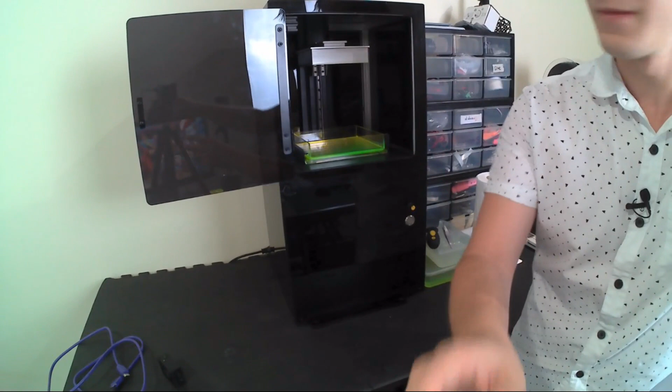So what you've got is you have the resin bath, which is filled with UV curable resin. I may need to top that up. And you have the print surface that drops into the resin bath, and then the laser's in here, and that will cure the bottom layer and it builds up.

So I'm just going to put on some of these bad boys just in case. It's not that dangerous, but just to be better safe than sorry. Let me just pop out chat so I can see it properly. There we go, so I'm just going to power it on.

So the SLA printers, there you go. It tilts the bath. SLA printers home like any other 3D printer, but you've got just a Z-axis though, in this case. The thing about the Moai, which is cool, is it has an actual galvo spinning mirror system. The laser is down the bottom, and it hits two mirrors, which make the X and Y axes on the plate.

So Ben, the printer's currently on Kickstarter at the moment, and he's already passed his goal. So this is a pre-production unit. There's a few things I've been in touch with Mark about to change, but yeah, it's already reached its goal, which is pretty cool.

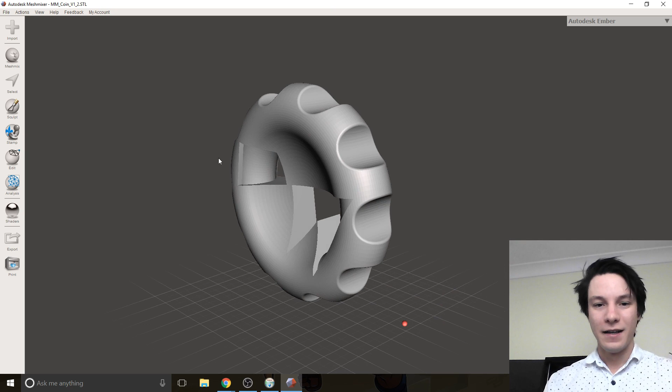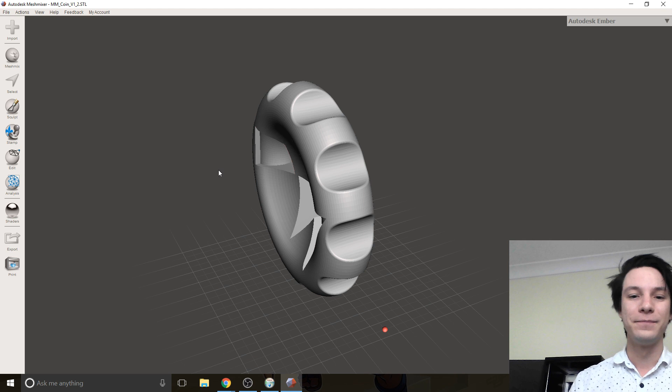Okay, so when you're setting up an SLA, you need to take into account the fact that you can't have a hollow object that is completely sealed. What that means is FDM prints in air, and you can have air inside the part. SLA prints in liquid, therefore there would be liquid inside the part, and SLA resins are pretty expensive. So I'm not going to do it on this model here, but I've got some examples I'll show you in a minute where you might want to hollow them out, for example.

Alex is asking have I run the Form 2. Not yet, though I do have one on the way, so I will compare it between the two. Although, to be fair, the Form 2 is a lot more expensive, so keep that in mind. It's going to be a better experience, but it's going to be a more expensive experience.

No, no, the Kickstarter's just started. It's already reached its goal, though, which is cool.

Okay, so the thing I learned when I visited Shining 3D in China, Hangzhou, China, is to get the best finish out of SLA, you don't want to print the parts flat on the build plate. You kind of want to print them at a 45-degree angle or so. That hides the layers better.

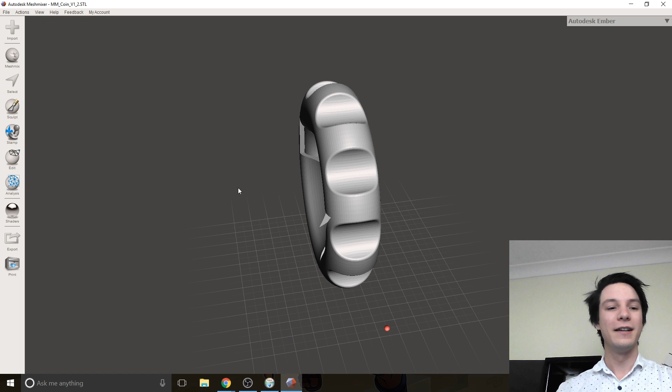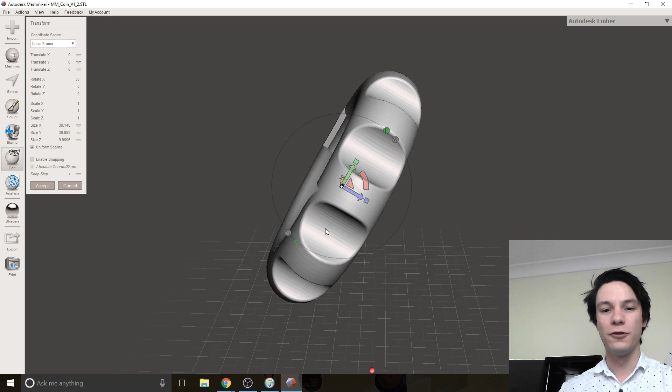So what I'm going to do first with this coin is orient it to be slightly angled. I'm going to go to Edit, Transform, and just rotate it maybe 30 degrees - not fully, but that will do. Also, I've got it upside down at the moment, and I'm pretty happy with that because this sharp edge would normally be difficult to support if it was facing the other way. So I'll accept that. Also, this is fairly computer intensive, so hopefully it won't stuff the stream up.

I'll keep looking at the chat if I can. It's 3 a.m. in Germany. Welcome, Tyson Power, thanks for joining me.

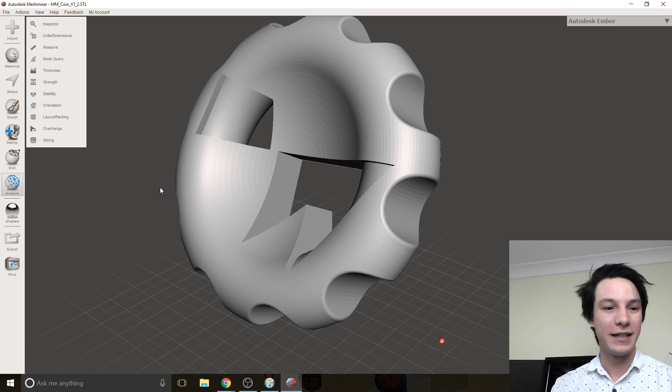Okay, so what we're going to do now is apply our supports. We're going to go to overhangs, and MeshMixer will automatically detect where it might need support material. It has various presets, and I'm going to choose SLA or DLP printer. This is where the stream might stutter, but I'm going to then generate support. I have an angle threshold - I'll leave that at 45. Let's just see how that goes.

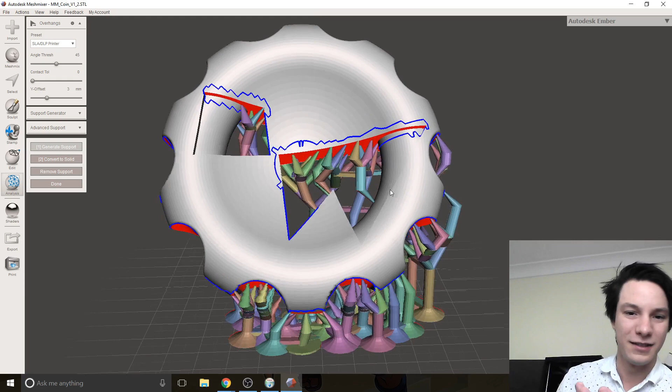Cool, okay, so this is a pin or tree-like support structure generated automatically from MeshMixer. Straight away, I can see it's done stuff that might not be needed, like here. But just in case, I'll print it anyway. Oh, actually, no, I won't - I'll just remove those supports and change the angle threshold slightly, because that's too much support. Let's change the threshold. Come on. Let's go to 60.

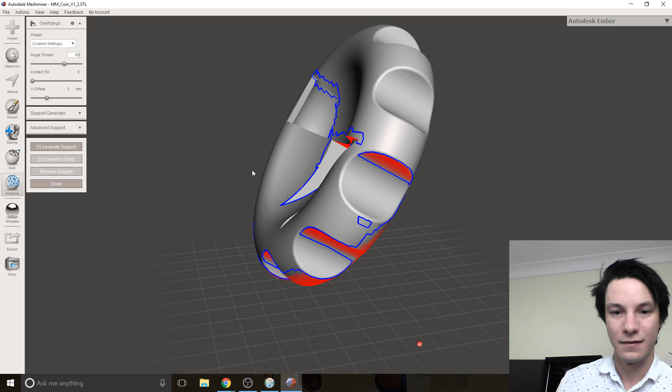Oh, it's too much. Wrong way. Some software you go one way, some you go the other way, depending on where the zero angle is, not perpendicular. Okay, that looks pretty good. So let's try to generate support there. What's the chat doing? Yeah, you always do need support in SLA, definitely, but you can get away with less than it sometimes recommends.

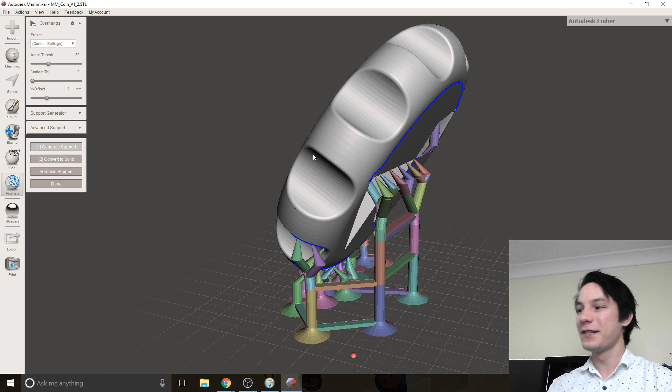2 a.m. in England. Yosef, is this your first SLA? Yes, it is actually. This is my first. I've worked with SLAs before, but I've never owned one.

So that looks pretty decent to me. You notice as well the part's not resting on the build surface. That's important because you want it to be raised up slightly. You don't always have to do it, but because of that suction force, you generally want it kind of in space. And MeshMixer does these cool bridges. They do actually work, which is neat. And it's just another quirk of SLA. So I'm going to say done there. And that looks pretty decent to me.

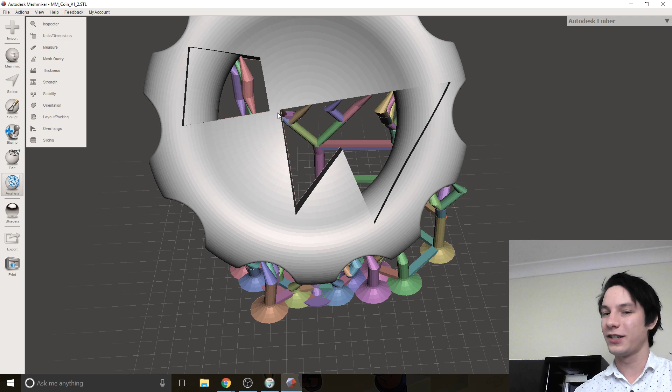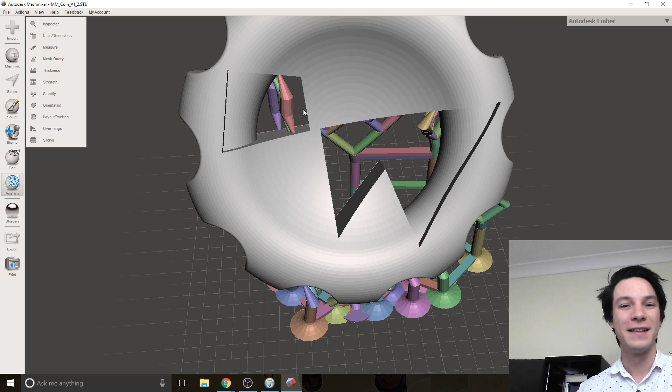So what I would normally do is make solid for this model, but I'm going to try just doing it normally because I'm using Cura. And Cura handles all these intersecting shells much better than Simplify 3D does or other software I've used. And what Mark's done is he's made a Cura profile for the SLA. So to put that in perspective, your nozzle is usually 0.4 millimeters in diameter. His profile sets the nozzle diameter at 0.069 millimeters. That's the pixel point, or the focus point. So I'm going to file, export, save this. Save as coin, supports.

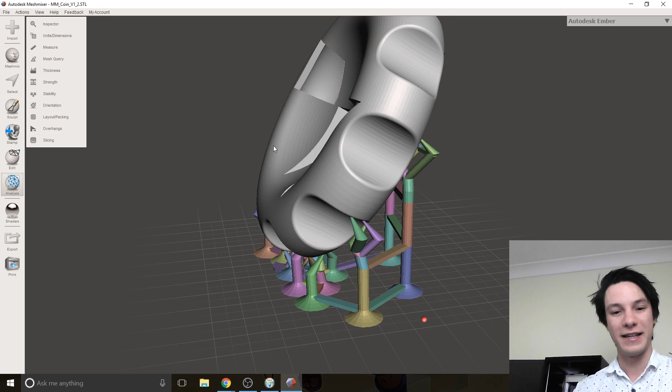What's the chat saying? Considering Open SLA now that you've got this kind of machine for testing. Yeah, there is quite a few low-cost SLAs now. And do you get scarring from supports? Yes, Carl, you do, unfortunately. One of the drawbacks of SLA of this type of system is the supports are the same material, therefore they do have an interface and they do leave little pock marks. That's why I've made it like this with the back facing here, and it's in the corner, you're less likely to see it, but yes, you will get pock marks from the support material.

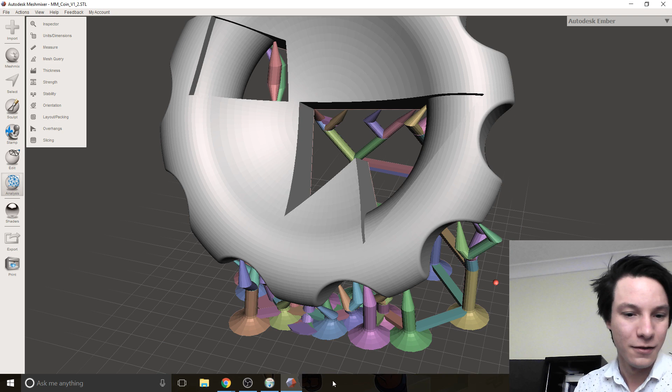Okay, now I'm going to see if Windows 10 knows how to find Cura. It won't find it because I haven't installed it yet. That's fantastic. Okay, let's install it. There's a bit of streamception here. Just what? Windows 10. Why? Downloads. Okay. Hopefully, let me download it and install it while the stream's running. Again, for those coming late, I had to jump ship from the other computer I'd normally run this machine on. So this is all just being set up for the first time. What could go wrong? I'm just going to change it to the other view temporarily.

There you go. Right, chat. So Alex is saying you can use very little resin after removal and UV light to repair. Yeah, you can actually, which is quite cool. You can basically get extra resin from the bath and take it outside, or you use a UV light to cure it and patch areas or glue things together.

Joel, 3D printing nerd, Angus, you're looking good at Midwest RepRap Fest. That is a tongue twister. Midwest RepRap Festival. I wish I was there, guys. That looked so much fun. Honestly, I'm so jealous of you, Dustin, Chuck, everyone who made it there.

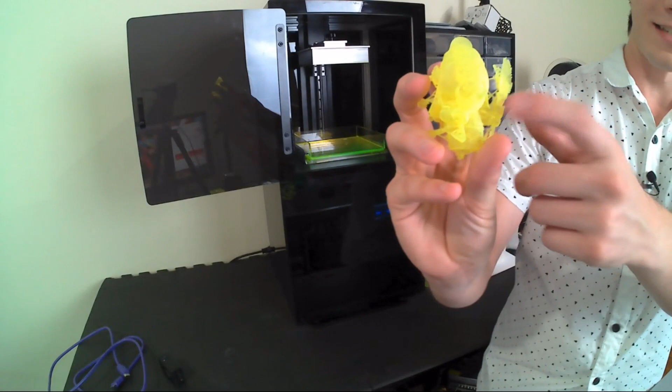Okay, while that's installing, I'm going to show you some example prints I've done. So I've got here, this is the first print that I did on the machine. So this is loaded on the SD card before I had any idea of what I was doing. And Mark included, I think it's like some sort of little guy, but you can see how he's hollowed it out. So it saves resin.

And oh my God, Joel. From, where was it? I need to scroll up. Hey, from MRRF, Angus, we all love you. Oh man, thank you. Thank you. I wish I was there.

Oh man, you just threw my train of thought so bad.

Thank you. So anyway, it's hollow to save resin, and these are the tree-like supports that are generated. So that's the first print I did, and it hasn't even fully cured properly because we had very little sun. But this is the second one I did.

So this is a little SLA cat. It's the famous sort of Egyptian cat that I usually print on my FDM machines. This is printed at 100 microns. And I left the support material in place because I'm going to do a review in future. This is probably a good example of how things can go wrong with SLA.

It's sort of formed halfway up. So you do sometimes get parts that don't adhere correctly. Also, you notice it's actually hollow. So I hollowed them out to save resin.

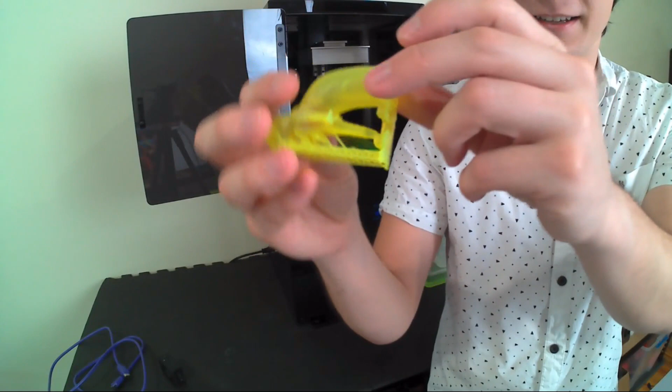Friendman is asking, is SLA faster than FDM? It depends. This machine is actually pretty darn fast, but some SLAs can be very slow. Also, you have your resolution of down to 10 microns in some cases. I wouldn't go any less than 25 on this machine, though.

The reason he's donating is because he's drunk. I love Drunk Joel. I am going to hang out with Drunk Joel one day.

Okay, run Cura. Okay, I'm going to switch back. There you go. See my lovely face. So I'm just going to get Cura installed.

Cheering me on. Woo! Oh, Chuck, thanks for joining. So Chuck's saying the printer is next to my booth at Midwest RepRap Festival. Yeah, tell Mark I said hi.

Zishan is asking, UV cured resin still needs to be cleaned in an alcohol bath, correct? Absolutely. So I have some stuff here behind me, some IPA and some water and gloves and things. So when I do the print, I'll show you how you clean it.

Okay, is this installed? Yes, okay. Right, so I'm going to add my custom profile. Just 1 minute. Again, apologies. This was not meant to be done on this computer. Entertain yourself in the chat for the moment. File. Add printer. Oh, come on, how do I import the settings? Can anyone help me importing the settings in Cura? I've completely forgotten how you do it.

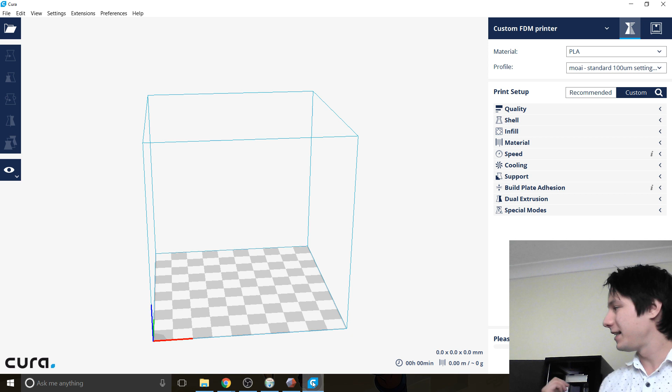I can't really read them out right now, but I'm just going to go back and show you what I'm doing in Cura. Okay. Right, so got Cura fired up, and basically this machine takes standard G-code. So all you need to do is go to Open File, and I'll navigate to my coin. But you do have to do the supports manually. Well, not manually, but in a separate program. You can't use Cura supports. It's not going to work.

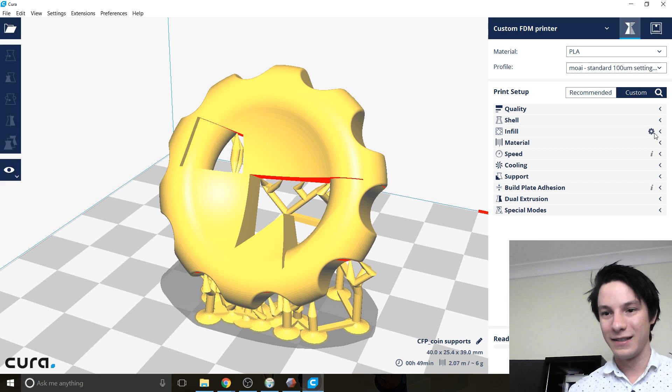So you notice I've got the profile set up as the Moai standard 100 micron setting, 0.1 millimeters. And if we go through the different, I guess, options, probably need to. By default, Cura hides everything, which is annoying. That's okay. We don't need to see that right now. So if we go to the layer view, this is what we've got. So I moved it, and it's going to reslice. I dislike Cura somewhat. I will be honest.

Joel's not drunk on Angus. He's drunk on all the high fives he's gotten today.

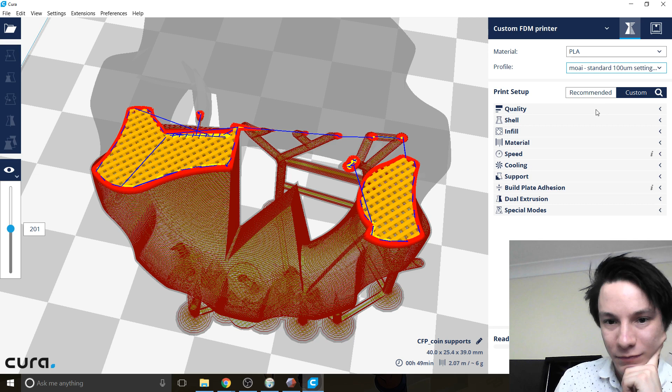Okay, let's try that again. So if you view it from here, that's not correct. Why? Okay, I'm gonna have to change something. 1 minute. I'm sorry. I'm so sorry. Going back to the instructions. Print settings. Instructions. So to Mark's credit, he has put together an amazing amount of instructions already, even though it's not released.

Yes, you can now disable auto slicing. I did see that in the latest version. Thank you. Why am I not using Simplify 3D? Because Mark has not set up Simplify 3D as a profile. So he's used Cura, which is fine, actually. Cura works quite well.

Right next to Joel. Okay. Sorry.

Okay, so he used Cura 2.4. I did just install 2.5. Hopefully that doesn't change things very much. Okay, so I've imported the preset, but for some reason the infill is not correct. So I'm just going to go into preferences and make it show all the settings, which it's hiding. Okay, check all. Thank you. Okay, now it's updating. All right, sorry, back to the chat.

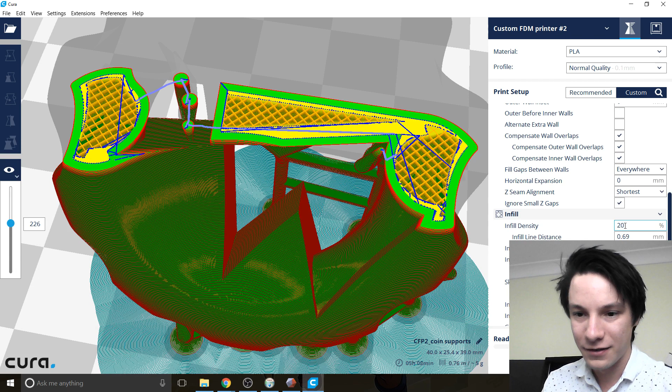Okay, I'm going to go back to the other screen now. Desktop, there you go. So I've done something wrong. I don't have the ability to think about it too much right now, but I'm going to just change my infill setting to 20. And the nozzle size seems correct now. I'm sorry, Mark, you're probably cringing. It is properly set up on my other PC, but on this PC, it's not at all.

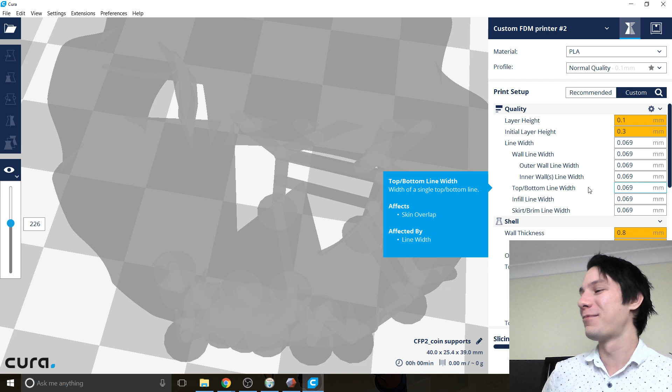The chat does have massive delay. Yeah, YouTube chat always has huge delay. What do I think of the $100 Peachy printer? I think that printer doesn't exist because it was used to build a house.

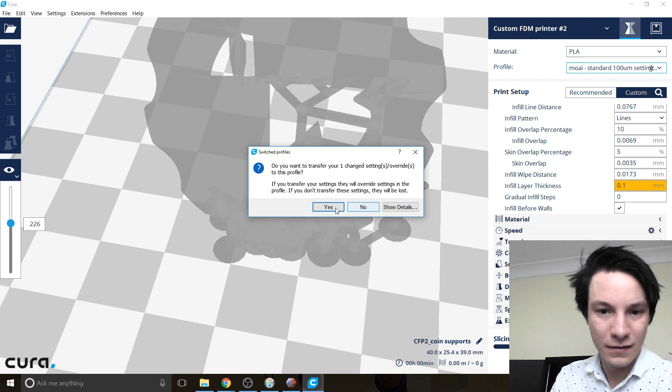Okay. So that looks pretty good. Oh, it's got a brim. No, don't want a brim. Profile. Moai. Go. Slice it. Yes. Okay. Yeah, so I just set the infill higher. That's fixed it.

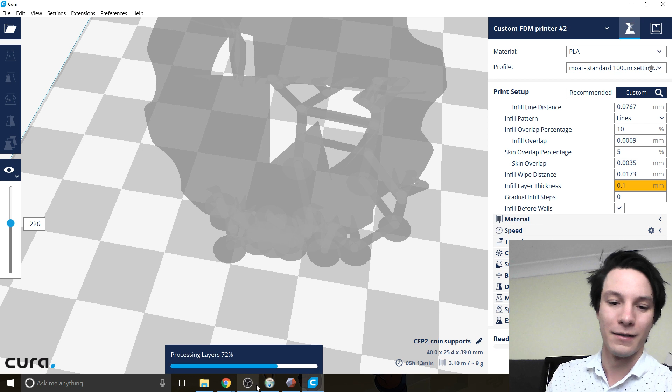Thomas, what are my thoughts on the filament extruder or any kind of filament recycling? I did do a video on Refil recycled PET bottle filament, and that's the way to go in my opinion. Which ones? There you go. I wouldn't try to do it yourself because there's diameter issues. I know you can do it, but don't expect an easy experience.

All right, I'm just going to send this across. Let's see how it goes. So get the SD card. Right, pop it in. There's a bit of a learning curve trying to figure out how it all works.

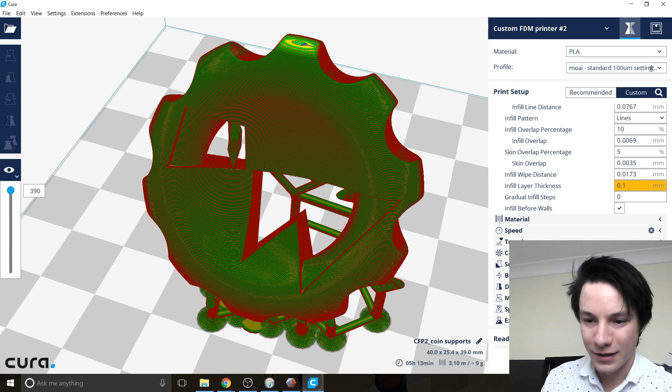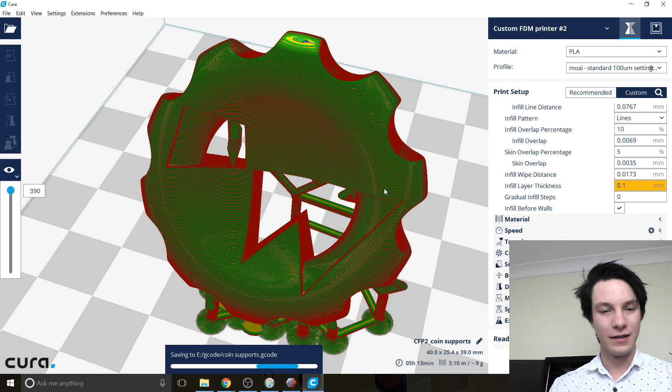Okay. Oh, open. No, I said, I'm so clever today. Save file. Save. Coin supports. That'll do. There we go. Okay, save. Yeah, you do need to do solid infills, but at the laser focus, you're not going to see any difference between 90 and 100. Saving. Okay. Let's go to scene again.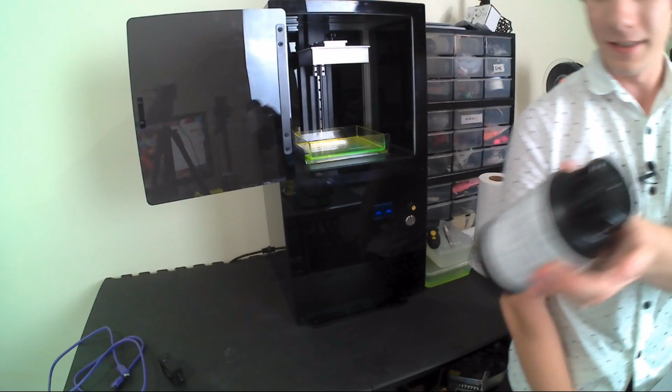So this is the resin that Shu sent across. And I'm just going to get some gloves. So you know what they say about gloves. What do they say about gloves? Yep, trying to keep up with the chat.

Do I have an opinion on the Anet A8 printer? You get what you pay for. Kits, in my opinion, are a hobby, 3D printing, not so much of a tool. But I do intend to test an A6 out at some point, but not the A8.

Who knew putting gloves on was so difficult? Am I putting it on the wrong way? Yes, I am. I'm so clever. These are nitrile gloves, not latex, so they're a bit harder to put on. Why is this? What? Can't get my pinky into the... There we go. Thank you. Right. I would never come across as a doctor. I have no idea how to put gloves on.

So Thomas, the program I was using before for support material was Meshmixer, and the program I was using for slicing is Cura.

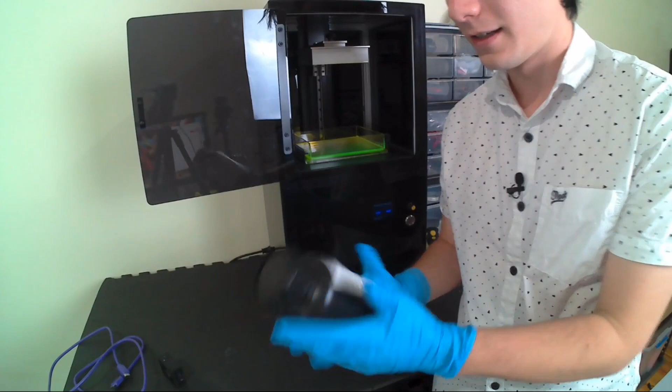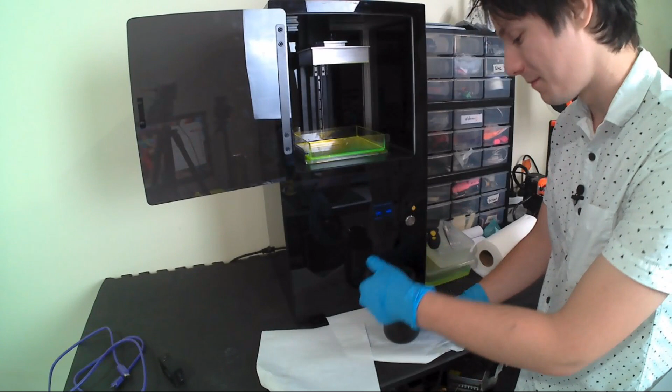Right. Gloves. All right. So you do need gloves to handle this sort of stuff. Resins are not the safest things. They're not too bad, but you do need to be pretty careful with them. Also, I'm going to get some paper towel out just in case. I have had a spill before. So Mark's put a line in the actual tray because what happens is as this drops down, the liquid gets displaced and it's easy to think that you need to fill it up heaps when you don't. So I'm just going to put a little bit more in than is currently there.

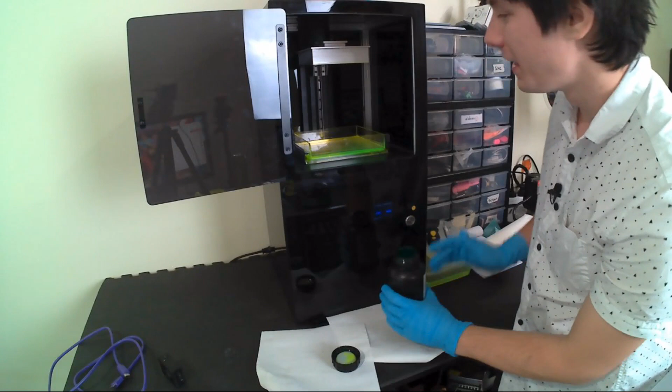That's probably enough. I didn't pour it straight in the center because it will make little bubbles, although that's not too bad. If there are bubbles, you need to let them settle, otherwise you'll get bubbles in your print, which is not great. Right, so set up like a normal 3D printer. You can see it there. And I'm just going to print, navigate to my folder, and navigate to my coin.

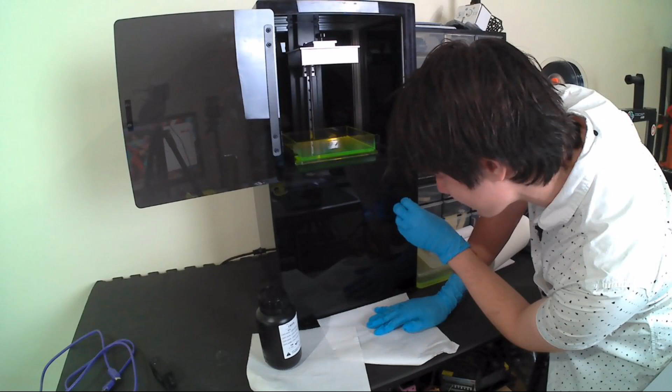I have tried a lot of prints on this. Where is it? There we go. And it's asked confirm print, yes. Laser goggles on, and that's confirm the print. All right, see if it works. So that's how it releases the layers.

Alex, do I have a video on Meshmixer versus Netfabb versus any other? I've done lots of fixing videos, but I'm not a big fan of Netfabb because it doesn't stitch shells together.

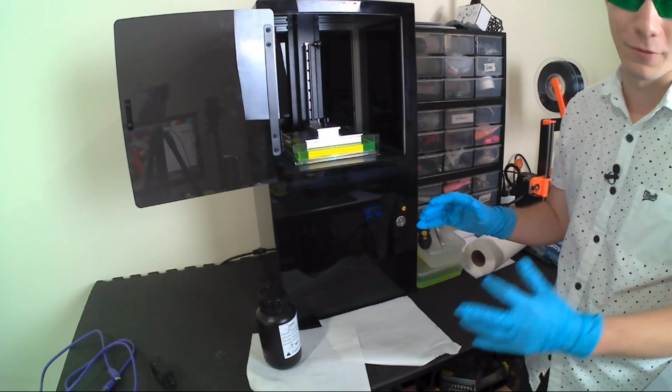Cool. Okay, so what you can see is the laser underneath is now applying that first layer to the print. And it does run a little bit slower than it would normally because it wants to really bake that first layer onto the build plate. And this is where your print will fail or succeed. If it doesn't stick, it's going to stick to the acrylic instead, and that's when everything goes horribly wrong. Yeah, no, I don't know who asked if you can use PLA on an SLA 3D printer, but you cannot.

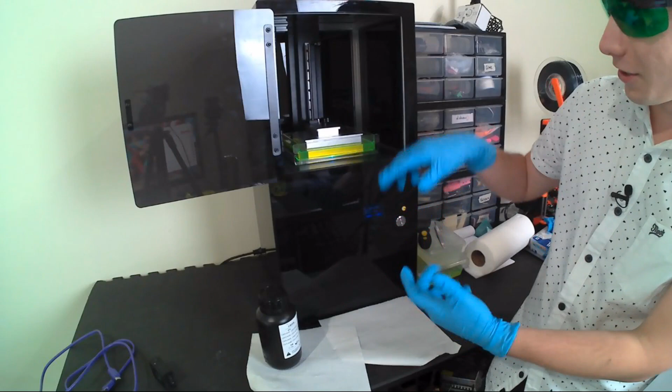So the thing about SLA is the print's upside down. So it's going to come out of the bath as it rises up. And it's a bit trippy because in time lapse, it looks like it's growing out of this bath from nothing. So this is bottom up SLA, which is this. But there is also another variation called top down. I have a Gizmo 3D, which is a DLP top down resin system that I'm going to be testing after this. And with that you need a larger bath because the platform drops into the bath rather than the platform coming out.

Fix the glare. I can't see the glare. Oh, that glare from that. Does that help? There you go.

Jim, is this a Form 2 clone? No, it's not. The Form 2 is a different design. It does use galvos, but it's a completely different design. This is a custom-built machine. So Mark designed the galvo system and the galvo controllers.

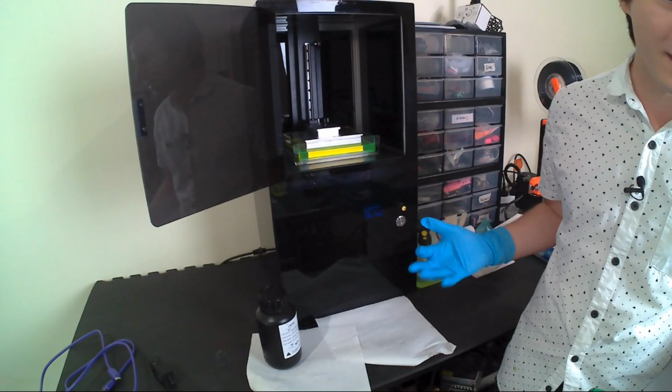Don't know if you heard that, but there was like a sort of click, a clack noise as it released. That's a good sign. That means it's relieving suction from that first layer. And from here on, you can see the laser starts really going at it. So SLA is not actually that slow. So I'm going to give this a 50-50 chance of working. But I do have a coin I've printed before.

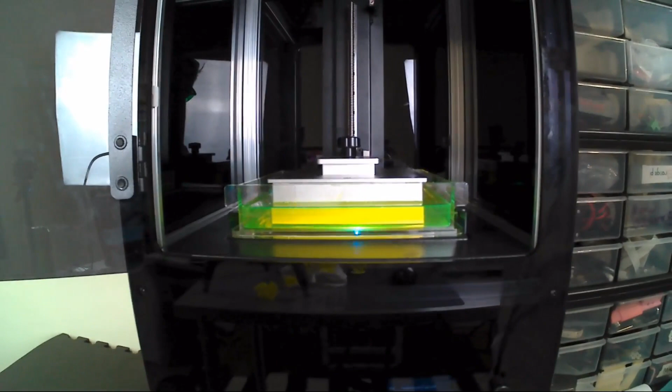Zoom in on print, please. I will try. Okay, let's see what I can do. I'm very cautious because everything's been failing so badly. I'll put the glasses on again if I'm facing it. Okay, there you go. Give me a second. Just turn that off. There you go.

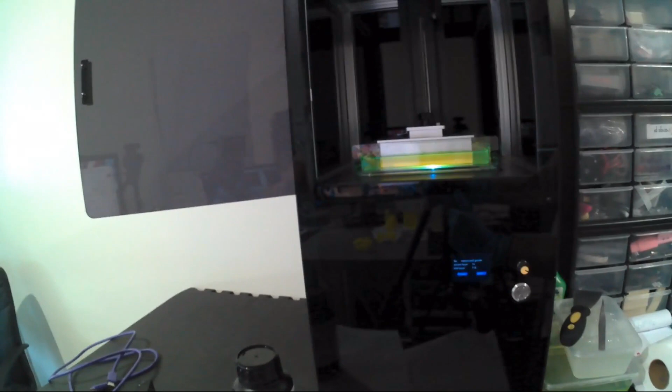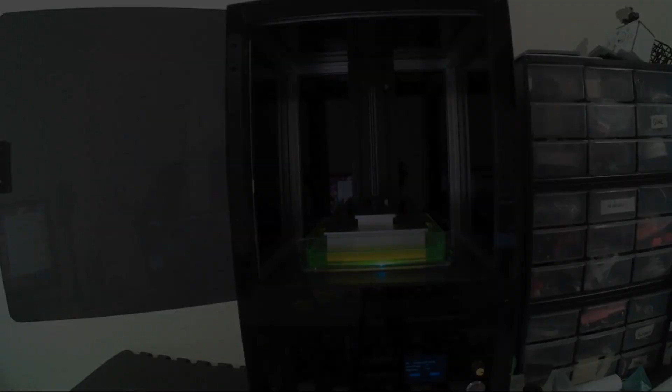When am I reviewing the Gizmo 3D? ASAP, it's just a very big machine, and because it's top down, it's, yeah, sorry about the camera juggling. I'm trying to figure out a good way to do it. Let's try this. Because the cable's only so long. This is the problem why I couldn't use the other computer. Sorry. So I'm just going to change over while I do this, so you don't get horribly seasick. There you go.

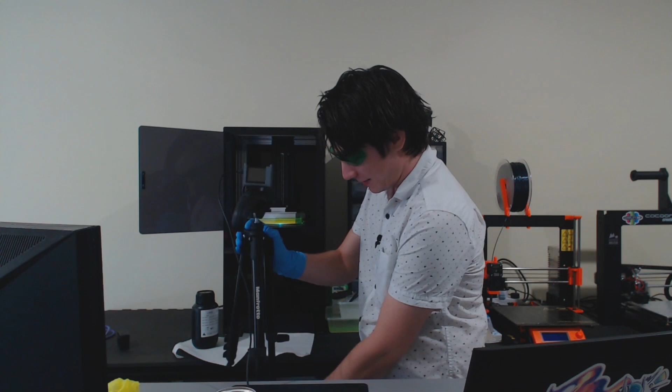Did I cap the bottle of resin? Yes, I did. It's fine. It's sealed. Is it smelly? It does have an acrylic, acrid smell to it, definitely, which is not very pleasant, but it's not too bad. If you've ever laser cut something before, it's that sort of smell, but not nearly as severe.

Yeah, so how it works is there's a galvo laser in here. So that is a laser with two different motors, and the motors have mirrors on them. So you imagine the laser hits one mirror, it directs it up, and then the other mirror directs it sideways. So you get X and Y movement through two mirrors, which are spinning. And then you can make it do really fast, as you can see, really fast movements.

So each time the bed moves, that's a layer. So it's not very slow. It's actually quite fast. But it will take longer for bigger prints. All right, let's see if this works.

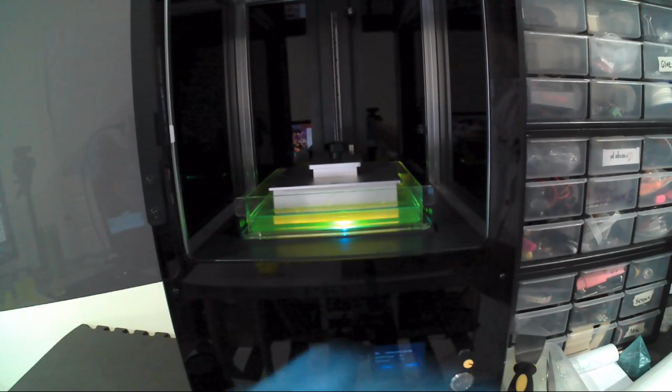Right. Yeah, technology nerd saying the resin smells really bad. It does depend on your machine though. Some resins are a lot less smelly than others. Okay, let's see how this goes. Okay, that should work. There you go. Yeah, don't touch the resin, ever. That's why I have these nitrile gloves.

Okay, going back to the chat. So, what have we got? Have I missed anyone? Apparently Joel's stream is a little bit chaotic. I'm not surprised. If you can't understand what's going on in Joel's stream, but you understand what's going on in this stream, yeah, this is a disaster, so his must be pretty nuts.

Yeah, so the printer's called the Moai, and it's on Kickstarter currently, and I think they had a $30,000 goal, which has now been surpassed, so it's definitely getting funded.

Pigumon is asking, will those galvos wear out quickly as opposed to a DLP? Not really. They're brushless style motors, so it's unlikely that they're going to wear out as fast as a motor with brushes or any sort of physical moving part. I mean, really, the machine has very few moving parts.

You're looking at a spinning motor system that could go for a very long time, and a Z-axis on a linear rail, and the tilt motor. So the tilt motor had a few issues that Mark's already corrected, and he's already upgrading the system, the galvo and all that, to a more powerful laser for the production machines.

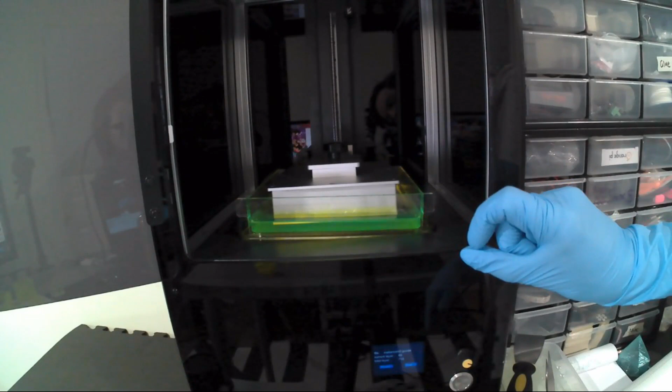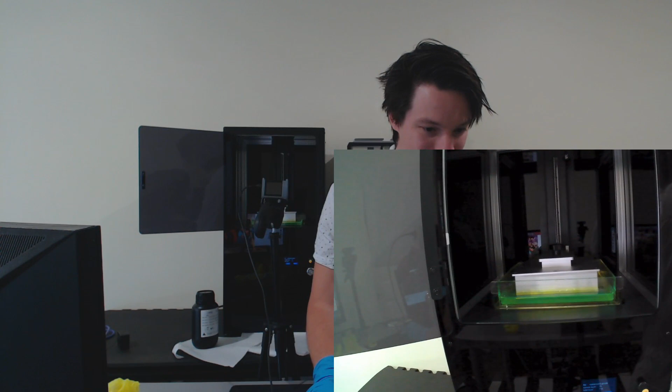So what I'm going to do is go back to scene, so you're going to see me, and I'm going to add the other capture, just pop it down there so you can watch it printing away. There you go. I may or may not have gotten resin on my laptop... no, I haven't, okay, that's fine.

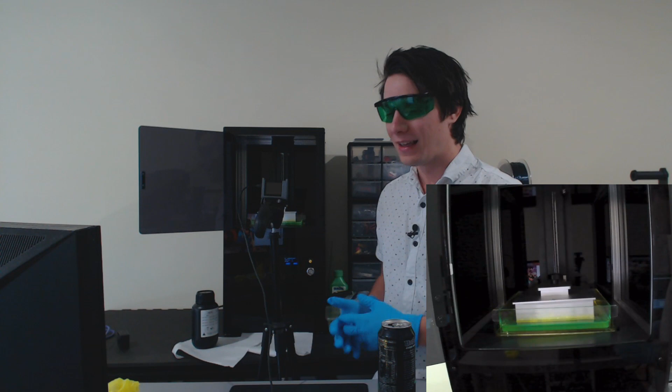So basically, to explain for those who've come late, this is the Moai SLA 3D printer. It's not a really dangerous laser, but it is a UV laser, so it's quite powerful, but it is protected in this black box. It's a Kickstarter campaign for a DIY kit SLA 3D printer, and it's quite good. I've been testing the pre-production model for Mark for a while, and we've gone through a few iterations, a few changes to his instructions, but it went together really well. I had no issues at all putting it together. It's a really nice kit.

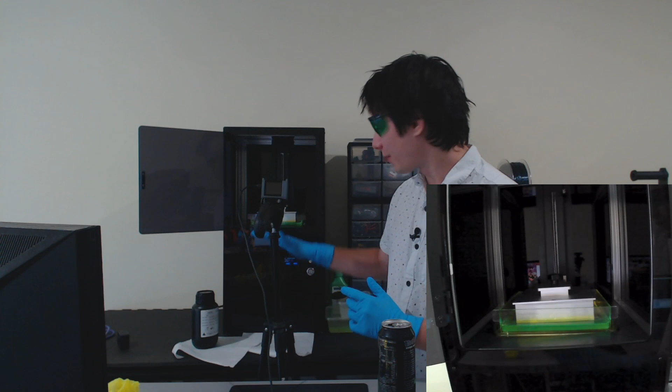Someone asked before if the print trays are infinitely reusable. They do have a shelf life - they do get damaged each time the print separates. Also, if you have a print fail and stick to the bottom of that acrylic tray, that's when you're going to get issues - you might damage it.

Ben's saying they're all drunk at MRRF. That's awesome - you can totally put both streams on.

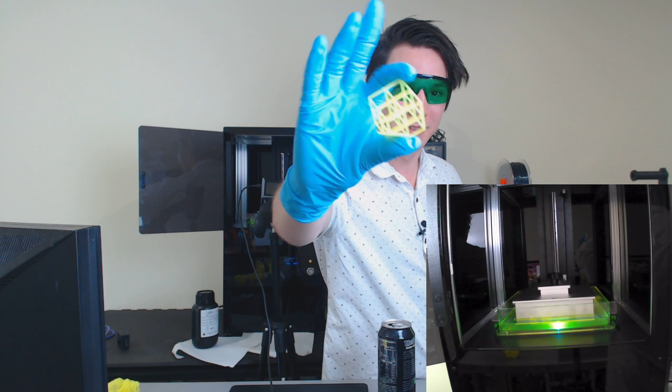Right, so while this one's printing, I'm going to show you guys this. I might have to turn my light back on, sorry, but I will point it away. So this is the lattice cube torture test that I designed for FDM 3D printers, but it's at half scale, printed on the Moai SLA 3D printer. And because it's designed with the overhangs, you don't need support material.

So it's not as tiny as the ones that got sent to me from Sapphire, which is another SLA system, but it is pretty darn small.

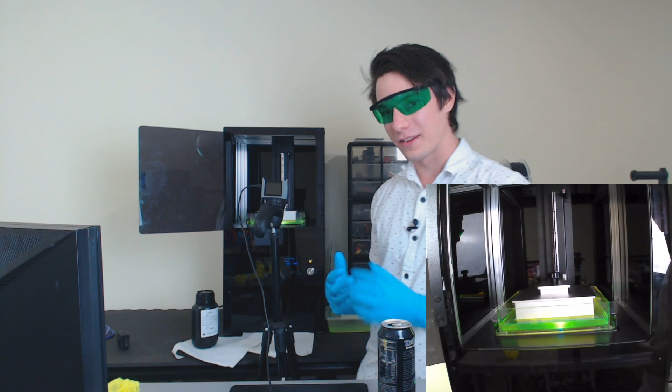Is there a HEPA filter on this machine? No, there are no safety considerations - the door doesn't turn the laser off, there's no filtration system. So this room does get a bit smelly with this running, so I run a fan that vents air through the entire room. Right now it doesn't smell too bad - this resin's had a bit of time to off-gas. When it's straight out of the bottle, it does have a bit of a smell to it.

Mr. Nard King, hello from the tundra of Alaska. Wow, that's awesome, dude.

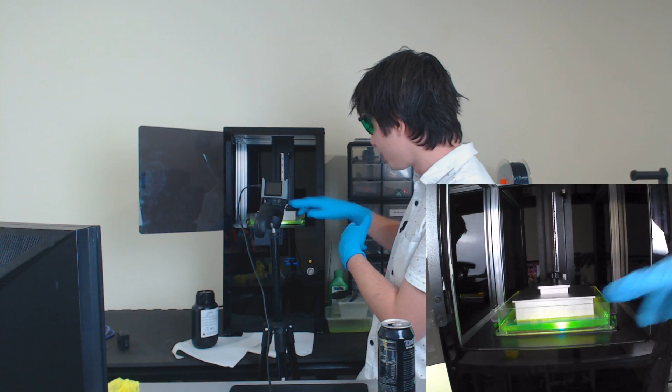For all the specs, in the description of this stream, you can see the Kickstarter campaign. So the thing about SLA I explained earlier in the stream is the laser focus point changes - the center might be perfectly focused, but the outer edges might be out of focus, because as the laser moves with the galvo, it's from a set fixed point. It doesn't move perpendicular, it moves at an angle. So to get good focus, you can't print too large - although the plate's this large, the tray's this large, you can't really print right to the extent. But the exact specs are on the Kickstarter campaign.

I'm going to take these gloves off now. I will need them to clean up the print though.

Apparently Joel's stream sounds like a frat house.

How much is the printer? It's about 800 US, I believe. Yeah, that's about 1,000 including shipping, I think. All right, I hate gloves so much.

Have I swapped my Red Bull for Monster? No, actually I've discovered this sour apple Monster, which is really quite nice.

Can you still see it if I close the door? Is it still visible? Not really. Okay, let's leave this open.

Ugh, looking through these is like... oh, that didn't work at all. It makes everything have a green tinge, so when you take it off, everything looks orangey because your eyes have been compensating.

Yeah, so it's a Kickstarter and it's $1,000.

Blow into the gloves to take them off. I'll remember that next time. Thank you, Derek.

Yeah, I do have a box, but I've almost run out. I should have bought a bigger box.

So the thing about SLA to remember is traditionally it's been really expensive. The Galvo systems alone were several thousand dollars. Remember the original Form that came out was a couple thousand dollars. So we're used to 3D printers costing very little money now because FDM has come so far down in price, but SLA hasn't. We're only starting to see that get cheaper now. So we've got this machine, for example, and then we've also got the Wanhao Duplicator 7, which is a DLP system for $400 US, which is really cheap. But it's only now starting to happen.

Video scrap heap, thank you. I probably shouldn't use it on more Red Bull, but I probably will.

Someone's saying I should get a laser cutter. Yes, absolutely, I would love a laser cutter, but I don't have space though. The thing about laser cutters is the ventilation is really important. I need to keep this room ventilated for smells, but laser cutting produces very toxic fumes in some cases, and you need a proper ventilation system. So down the track, if I get a larger space where it's more industrial and I can vent safely or filter safely, I would absolutely love a laser cutter.

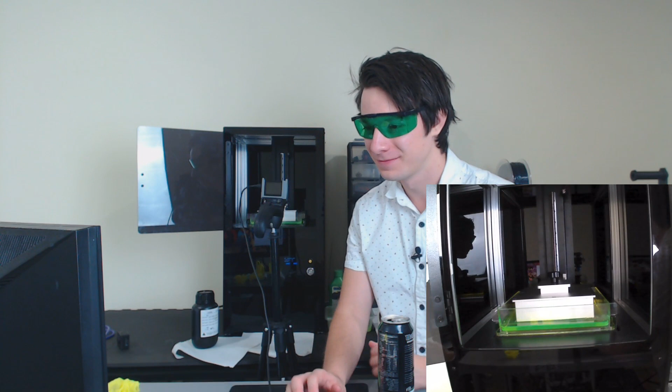Shane's saying, heads up, the reject shop has V and Monster for $2. I don't need any more help buying this stuff.

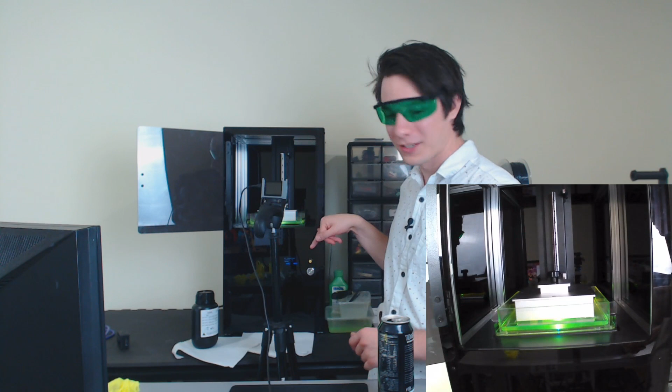Matthew, what am I doing? Okay, let me explain again. So this is a maker coin that I'm printing currently on an SLA system. You'll notice, guys, if you can see, I'll make it a bit bigger. Now the plate's getting out of the resin, and this confused me initially because it looks like you don't have enough resin, like you'd be tempted to pour more in, but that's not the case. The part can lift completely out, and as long as that bottom layer is still touching, you're good. This is the point where I can look into it and see if it's working, which is what I'm going to do here.

It's very difficult to see, but it looks like the support material has adhered correctly to the build plate. It's hard to tell, though, so it may fail horribly. Don't blame the machine, blame the user - 100% in this case. Okay, let's go back.

I don't know the future price of this printer. As with any Kickstarter, it will go up in price, so you can jump in the Kickstarter to get it. But I do need to mention that being a Kickstarter campaign, it's not a pre-order. You're backing the development of a project, and you may not get the machine, or it may not reach your expectations. So I'm not saying back it without any research - Kickstarter is not pre-ordering, so keep that in mind.

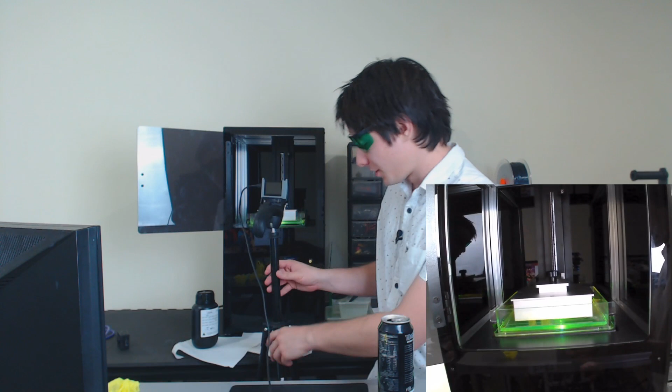It seems to be going okay, I don't know how long this will take. I'm happy to just chill for a while - I've been going for an hour. It's all good, I like answering questions. Everyone's all over the world and I'm just here in Wollongong. Yeah, I feel you, man.

Joel just finished his stream. I'd love to hear what happened with Joel's stream - that sounded like complete chaos. I mean, they must be having a pretty good time to decide to stream after that many, I guess, beers.

Neil Levine, greetings from my basement. Dude, you have a dope basement setup, your streaming setup is amazing. Like, look at this crap, I'm just throwing stuff together. Yours is just ace. If you guys haven't seen Nillabean's streams, definitely go check his channel out - definitely the best stream sort of set, or studio, by far.

Crank, Angus's recommendation for the Trinus gave me a nice printer. Yes, the Trinus is quite decent - I'm really happy with the one I got sent pre-production. I have some parts to upgrade it, which I need to get around to doing. Print volume's a little bit small, I'll be honest. For a machine that's that rigid, it's a bit unusual, but if you're printing small things, you can get very good accuracy, which is quite nice.

Randall, where's the Bunnings shopping video? That'll come at some point - a lot of things have changed, so yes, I'd like to get onto that at some point. Unfortunately Bunnings is really expensive - if you want to get anything, it's a real rip-off. So even though it's a nice idea to go there to make a project, I'd rather buy stuff online and save like half the price. We'll see.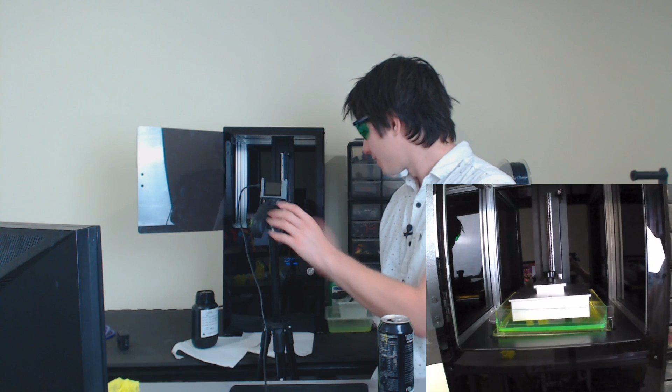How long will the print take? I don't know. The estimates out of Cura are completely wrong because they're optimized for FDM printing, not SLA. So looking at it now, it is hard to see. It's going to be going for some time. So I will definitely update you guys on the progress, but I may as well show you some other examples.

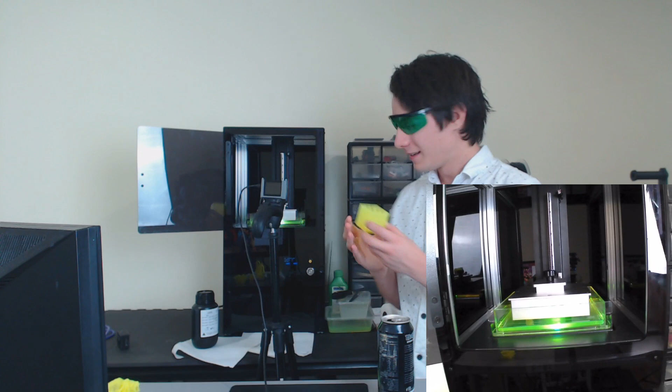So this one's pretty cool. This one's awesome. This is what I wanted to do years ago. So what this is, if I can get my thing across there, thank you. This is using Meshmixer to create a lattice 3D structure that I've then put inside a cube and 3D printed on this machine. And the thing about this structure is it's so delicate, like incredibly delicate.

And it was always impossible to do on FDM. Like, as you know, the torture tests are hard. This is like 0.5 millimeter diameter rods. But it printed this like that, so down and then up. That was the interface surface. And it printed awesome. Like, that is so cool. So that's what you can do with SLA. You can't do that with FDM at all.

What is the monitor in the background? I can see the reflection. It's just a really crappy old Dell monitor.

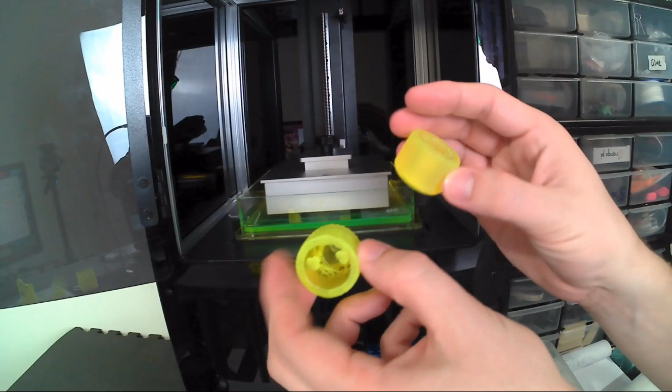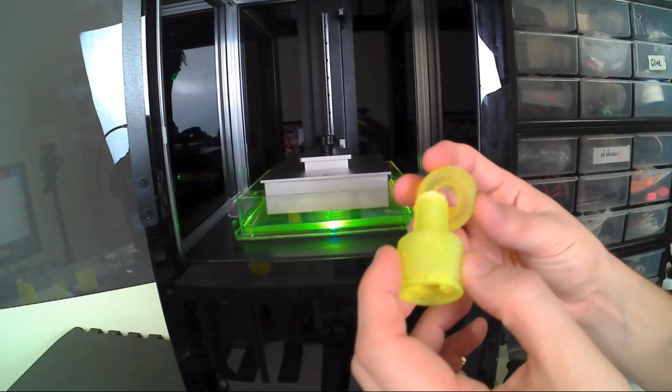So that's an example. One thing I have kind of picked up on is I tried to print this. So these are knurled gears. So this is solid. And this is hollowed out with supports. And when you're cleaning up parts, you have to use isopropyl alcohol or ethanol and wash the excess resin off because it's in a resin bath. And these don't go together.

They don't screw together. And I think the reason why is I didn't use a toothbrush or brush to actually scrub the parts. So this must have residue resin on it that's now hardened. You can kind of see the residue resin coming off. So that's another, I guess, learning curve is post-processing SLA parts because they come out sticky. They're flexible. You need to put them under a UV light source, which I've been trying to use the sun, but for ages it hasn't actually been sunny enough.

A lot of people are asking if SLA is faster. I've answered this about 10 times already, but basically it depends. That's the only answer I can put forward. You can do very fine layer resolutions on SLA, but then it will take a while. 0.1 millimeters will generally be faster than an FDM print, but keep in mind, these machines don't have an infill. They print solid. So if you're printing a large FDM part which is hollow, it'll probably print faster than SLA. Yeah, but as you can see here, with the layer resolution we've got, it's taking some time.

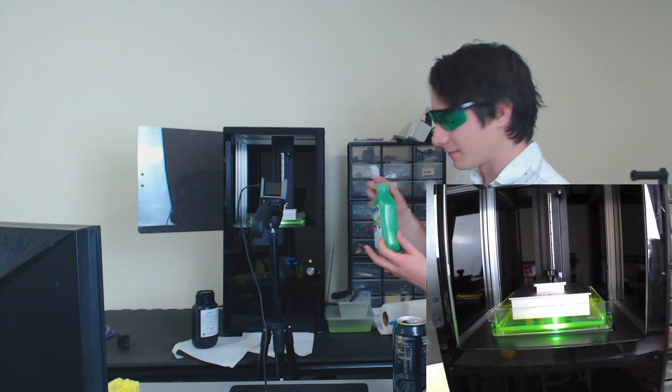Sarah's asking, do you wash the resin off in water or another liquid? So you want to wash the resin off in a solvent, usually. Some resins can be water soluble, but basically what I use is this. It's not very good. I need to get some actual ethanol, but this is isopropyl alcohol. You can get it in Australia called Isocol. Really expensive. This is like $10 per bottle. So I use this in a bath, which is there.

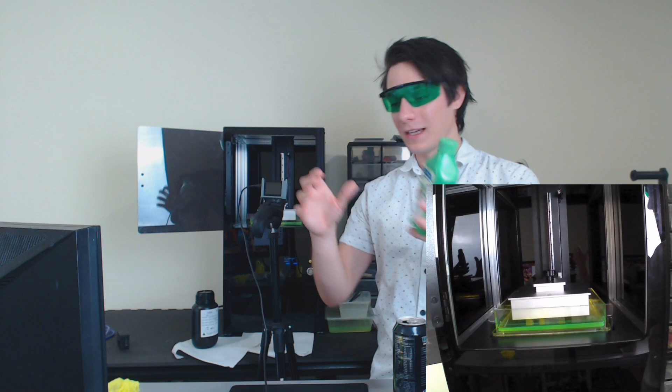And I wash the part in one bath of this pure and then another bath of water. And I alternate between the two. But like I was just saying, you generally want to actually scrub the parts, which I haven't been doing. I've just been rinsing them. So the next step's to get a brush, like a solvent brush that won't dissolve, and then scrub my parts to make them more dimensionally accurate.

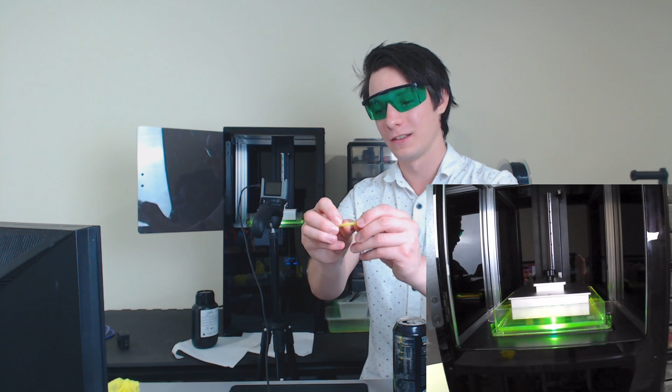Vincent is asking if the resin is durable enough for functional, useful parts, or is it too brittle? The resins do vary. This resin seems to be quite good, but it's also fairly brittle. I mean, I don't know if this is going to just break. Yeah, there you go. So this resin's very brittle, but it's hard. But you can get toughened resins as well. They're going to be a lot more expensive. So what I would recommend is to print things that need very high surface finish and detail.

So Nilla, you might be interested in this. SLA is fantastic for miniatures, like ace for miniatures, because you can get 0.025 millimeter layer heights. And looking how thin that is, you can do swords, small details. You do have to break the supports away, which are brittle, as we've said before. You get left with pock marks, but it's because of small volume. It's not a big machine. You can do very small detailed parts.

Mark's saying I should try metho. I was wondering if I should try methylated spirits, but if you're saying it works, I'll give it a go. That's cool, because that's a lot easier to get.

Yeah, in terms of post-curing, you do need a UV light source to harden the parts. This one has not been hardened, so you can see it's quite flexy still. But you can use the sun, or you can actually get these UV sources for nails, like fingernail hardening for manicures. Is that the one? Yeah, manicures is the nails. To harden the similar UV cured resins.

Peter's asking if there are any rubbery resins. Absolutely, there's rubbery resins, there's toughened resins, as I said. There's wax-like resins, so you can get a model like this and create an investment cast, and then use that investment cast to make a metal replica, which works very well. And there's all sorts of different types. There's water clear ones. You can get almost like a lens out of SLA.

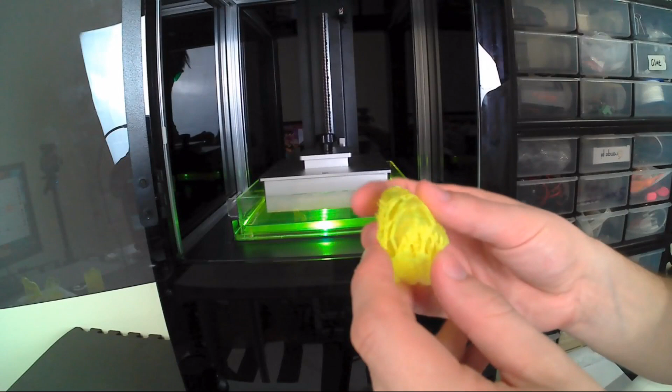And I haven't broken the supports off yet, but just to show you how the supports break off, you can just grab them there, and just kind of reach in, and they kind of come away almost like Velcro, just like that. Yeah, so you can put holes in using Meshmixer, no problem.

What the F? I'm not going to say that.

Will adding resin during the print cause issues with quality? It can. I have done it before. You need to watch out for air bubbles because the air bubbles can get into the print and leave you with voids and imperfections. So yes, you can top it up, absolutely. Just kind of do it from a corner where it filters in. Don't just roughly pour it in.

Yeah, I am going to try methylated spirits next. The IPA was suggested for other machines, like other SLA systems, but I'm going to try methylated spirits next because it's a lot cheaper.

TF is asking how long can you leave the resin in the bath? So this is UV curable resin, therefore it's sensitive to UV light. So this is an indoor room with lights that don't produce much UV light, fluorescent, that kind of thing. If I took this outside, the bath would cure in seconds. The UV source from the sun is extremely powerful and this stuff will just set. So you need to keep it away from any sort of UV source.

So that's why normally in operation it has this, which keeps the entire thing closed, keeps it safe, but also keeps the resin inside from curing. So I've had this in here not used for about a week and it seems to be working okay. The thing about SLA though is it's like a constant use machine. You can't buy one and leave it for months because the resin will slowly go off and it will cure. You get about 3 months in the bottle, but when you pour it out, I wouldn't leave it for longer than 2 weeks, honestly. That's quite a while.

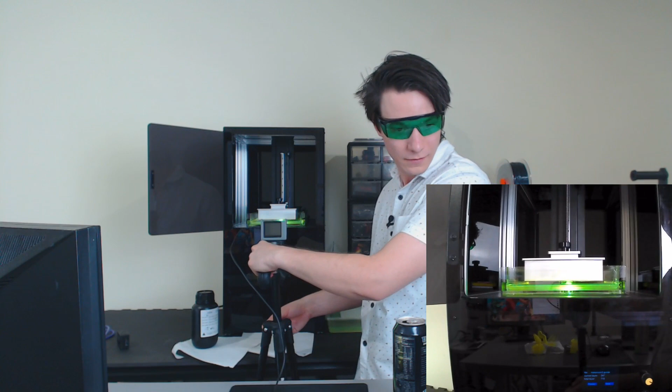I'm going to change the angle of the camera so you can kind of see it a bit better. There you go, you can kind of see the part forming now. So you can see it there as it's being lifted out of the bed. So this slowly goes up and leaves us with our part.

Necro is asking, does moisture screw the resin? I'm not sure. Not as much as some filaments, but it probably does something. I'm probably not an expert as to if it does or not, but it's been very wet here and this seems to be working fine. But the baths are definitely consumable items. They will wear out and they need to be replaced. How heavy is the resin? It's approximately the same as water, I would say. So yeah, your milliliters to weight is probably going to be about the same.

Ewok saying you need to change the platform every X prints. It's important. Yes, absolutely. So what you're saying there, this tray is a consumable item. So every time it releases, it damages it slightly. You're going to get the laser going through a cloudy base, therefore you're going to get less power and less accuracy. So this tray will need to be replaced probably soon because I haven't really treated it very well. But yeah, they are a consumable item.

Yes, so Trevor, the tray tilts to relieve suction off that base layer. So there are some machines on the market that don't tilt, they just pull up, and that means you get left with parts that can stretch because they're trying to pull apart from both sides. Yeah, so because the laser's curing the resin between the two layers, it gets stuck to both parts. And that's why it needs to break away, that lower part.

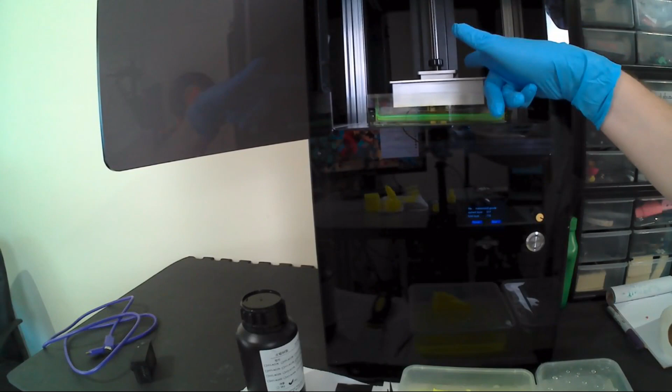So Ray's asking, so the resin is cold and cured by UV? Yes, so the resin's at room temperature. Some systems do warm up the resin. The Gizmo 3D actually can warm up its resin because it makes it cure faster when it's exposed to UV light. But basically the resin is not heated to harden. It's the UV light that is used to polymerize the resin from liquid into solid.

Joel's asking how much does the tray usually cost to replace? I'm not sure on the pricing yet. It shouldn't be too much though. It's not going to be as much as the Form plates probably, but have a look on their website to see how much Form charges for replacement build trays, and that should give you a vague idea.

Reader's asking, do I know anywhere in Sydney where I can re-extrude failed PLA prints? I know the University of New South Wales were experimenting with that. They have a grinder and a filament extruder, but it's very much experimental and not so much useful at this stage.

Okay, apparently it's easy to see the laser with the door closed. Let's try that. How's that? Maybe. You're getting reflections. What I might do is just show you some other prints. Let's go here. All right. So I've shown you all those, but I will show you, here's one I prepared earlier.

So this is a maker coin that I printed earlier to prove that it would work, so the stream wouldn't be completely disastrous, although it may still be. This one was 25 microns, so it's very fine. And you can see here, kind of, it's hard to see, but that's where the supports were, and it does leave little marks. So you can sand this back, and as someone suggested, use other resins and a UV source to polish it up.

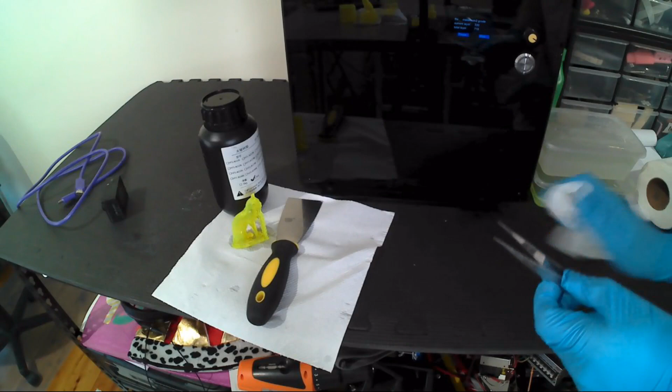CJ Powers is asking, any opinion on the Wanhao Duplicator 7? I think it's a very low cost, very cool looking little machine actually. I may be testing one at some point, but at the moment, $400 US for a DLP is unheard of. And apparently that works quite well. So what can you say about that? It looks pretty awesome.

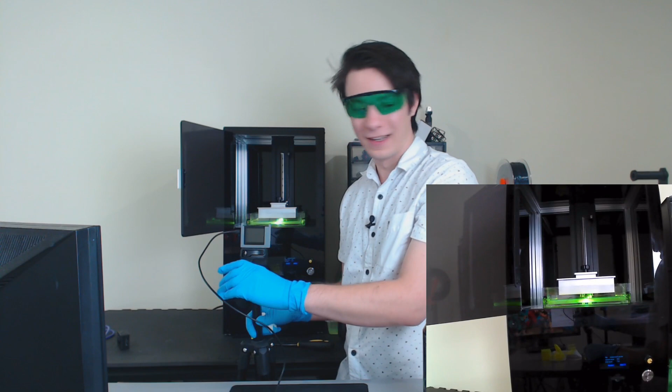Yes, I agree, Nilla. The resin prints are definitely sexy. Something that I'd like to do now I have the ability to print very fine detail is to look more into the wargaming stuff. You've got to think, like, Warhammer, they must be terrified of this sort of thing. Like, this machine's still pretty expensive, $1,000 US, pretty high. But look at the Wanhao Duplicator 7.

What if you could 3D print your own wargaming figurines? There's nothing stopping you. The detail would be there. And it would probably cost less than buying them because the resin costs would be less than the ridiculous markup they charge. Something's going to happen. It's going to be pretty cool when it does.

Oh, where's my mouse? I've lost it. There it is. Looks like a giant Haribo. Yes, the translucent color definitely makes it look like lollies. Or radioactive lollies, actually, I would say. It sounded like kind of a... I wouldn't eat it.

Brandon, what do you think of the CraftBot in a school? I think the CraftBot's very noisy, but very, very rugged and quite decent. So if it's a good price where you are, then I'd go for it, actually. They're quite nice. Definitely more likely than not to survive in a school than other printers.

Did I take off the Rave glasses? Yes, because I closed the printer. I put them back on, but no, it hurts my eyes.

3D Printing Lab, did you hear that the Olo, now called Ono, has started shipping 5 months delayed? Yes, I did. That is crazy. I was pretty certain that machine was a scam. And props to the Ono guys for actually making it possible. It still might be a disaster. It still might not work very well, but the fact they're shipping soon is awesome. Very incredible.